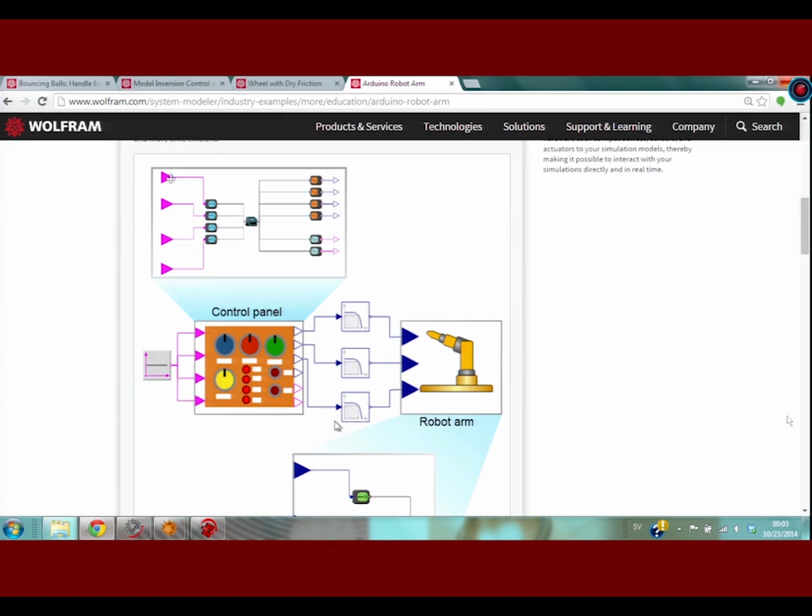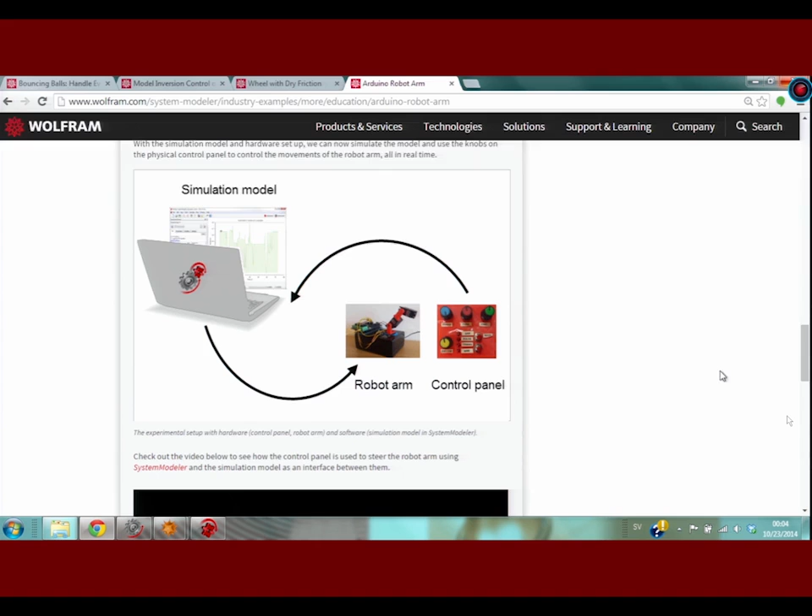This is an example of how you would use the ModelPlug library. In SystemModeler you build up a system with a control panel, a robot arm, and some filters to get a smoother drive of the system. At the end, you have a system where you connect a simulation model with a robot arm - input from the control panel goes to the simulation, which returns to the robot arm.

If we look at that, it will look something like this. You have a connection using the ModelPlug library, complete drag and drop, built together to connect to the Arduino board and communicate with the system. You don't have to do any programming at all - you just use a drag and drop library, just like with the hydraulic library or the mechanical library, plug in your Arduino board, and it runs.

That came out today, so I don't have a slide prepared for that - that was kind of extra information, but the connectivity session will discuss more about that.

But one important thing we added is the hydraulic library. The hydraulic library applies to a lot of different domains. Heavy equipment is probably one you'd most likely think of - aircraft, automotive, robotics, and so on are all systems heavily dependent on hydraulic systems. The library contains components like valves, cylinders, and so on.

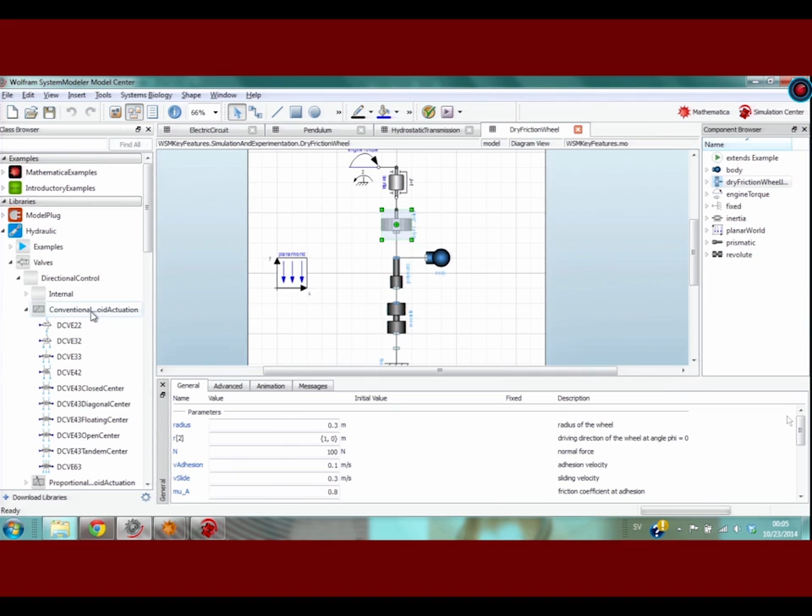If I look at the library - you already saw an example - it has different valves. I can open valves and see the directional control valves of different types, like conventional solenoid actuation valves and proportional actuated valves, and so on.

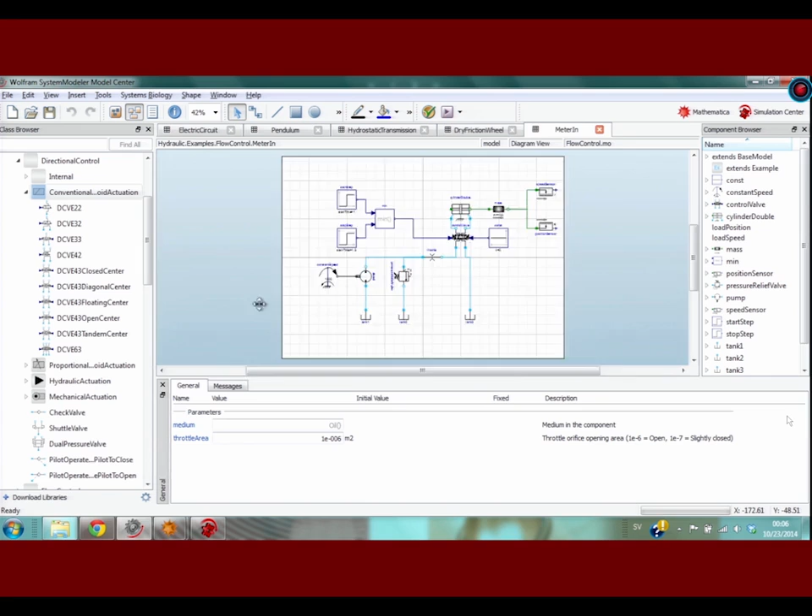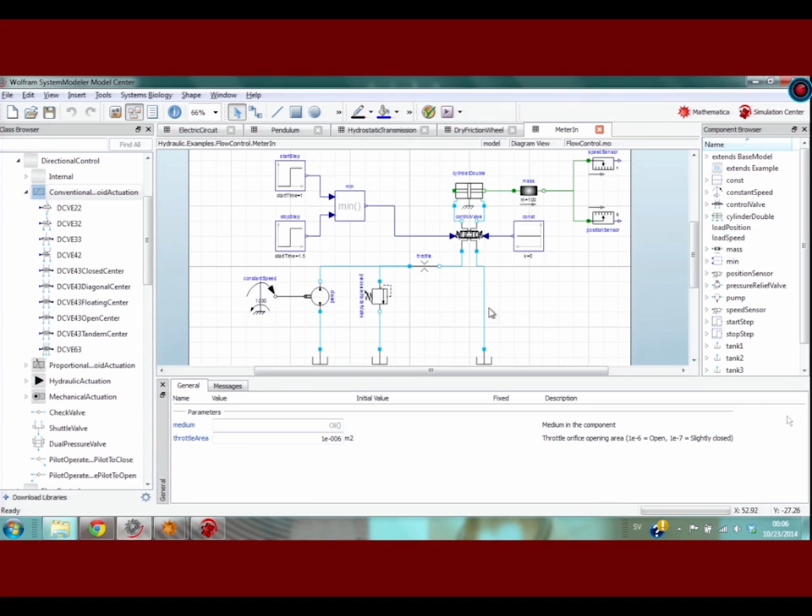We have all these different components, and you can use those to build up a system like a cylinder motion system. If we look at the hydraulic library system, it will look like this: we have a pump driving at a constant speed, which drives a valve, and depending on how we control the valve with input signals, it will be in different positions doing different operations. We also have a pressure relief valve, and at the end what we actuate is a mass that we try to move back and forth.

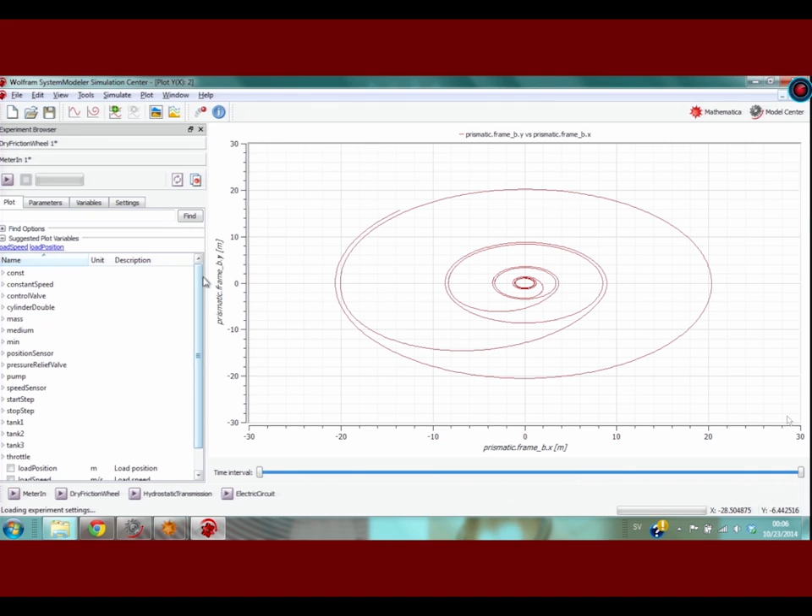When you have this kind of system, it works just the same way as any other SystemModeler model - I simulate that, and I have access to all the components, like the position sensor, so I can open the position sensor and see the position of the mass, how it's moving.

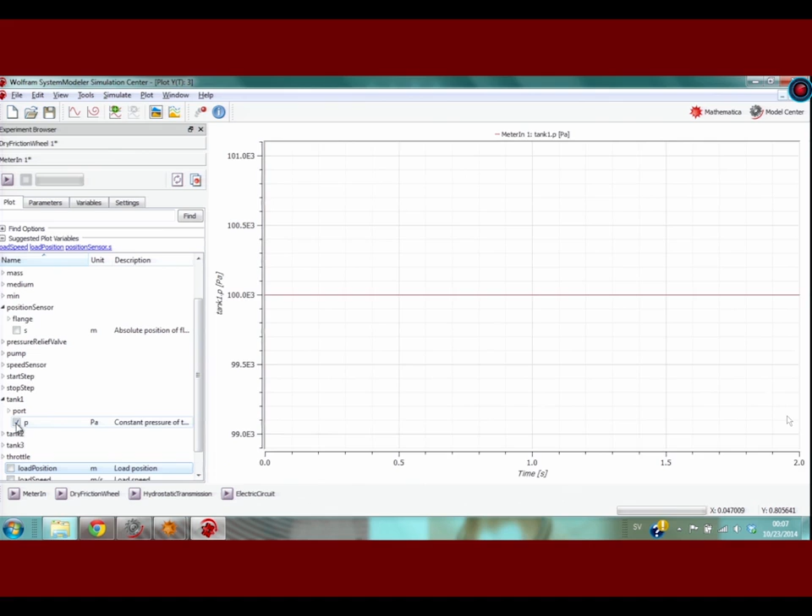Or I can access, let's say, the load speed. Or I can go into any of the tanks and look at the pressure - well, that was boring, the tank will have a constant pressure in this case. But I can go to the pressure relief valve and look at the leakage, pressure, mass flow, and so forth.

So I have access to all these variables, and I can connect it, as you saw, to other systems.

We also added a SmartCooling library. Just like the hydraulic library, this is a commercial library that you have to pay extra for. It's used to model cooling systems, especially in automotive applications, such as cooling fans or water pumps. This library, by the way, is developed by a third party, the Austrian Institute of Technology.

So if you're interested in developing and deploying your own libraries, you can do that through the library store now. Users will be able to buy them, or if you provide it for free, download them for free and install them automatically to SystemModeler.

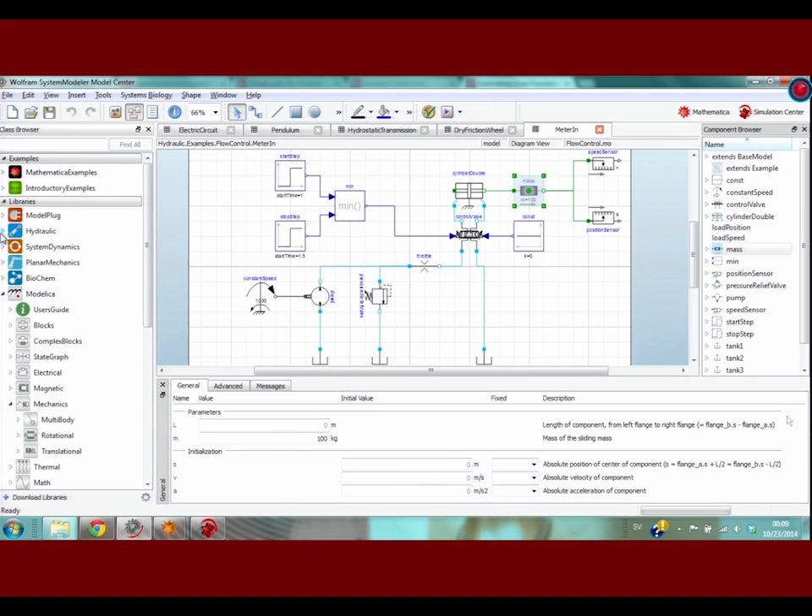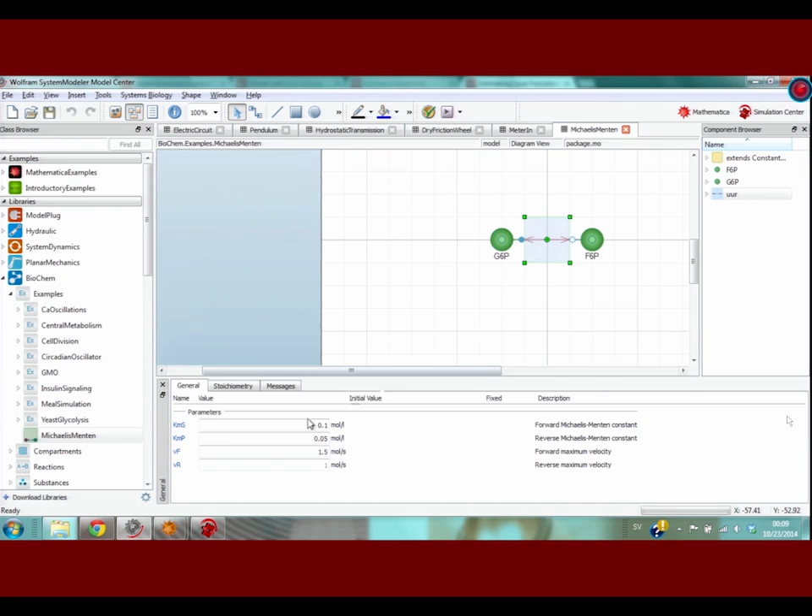Simple pathways that are Biochem examples. This is the simplest possible biochemical pathway: two compounds, glucose 6-phosphate and fructose 6-phosphate, that are connected with some reaction here that has parameters governing the reaction. Basically what we simulated here is the transfer from one to the other, and the mass balance between these two.

And as you go, you develop more complex systems like the metabolic system, which has a lot of these compounds. You can also add things like the liver, the cardiovascular system, and the blood plasma. Each of those has pathways that are interconnected to each other.

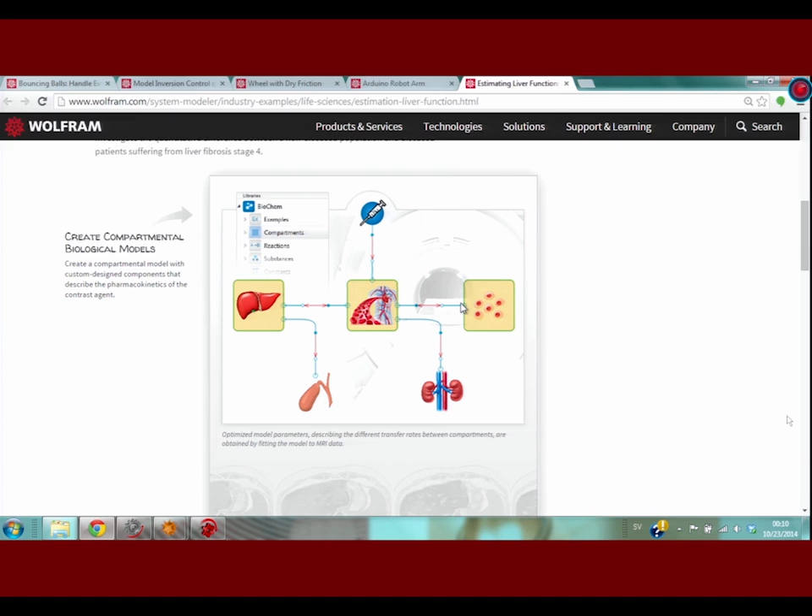And we can do experiments. In this case, we have a contrast agent that we inject, and we want to see how the contrast agent transfers through the body. We can get something like this, where we see variation. We do simulations with different inputs, and we get different outputs for the level of contrast agent in different parts of the body.

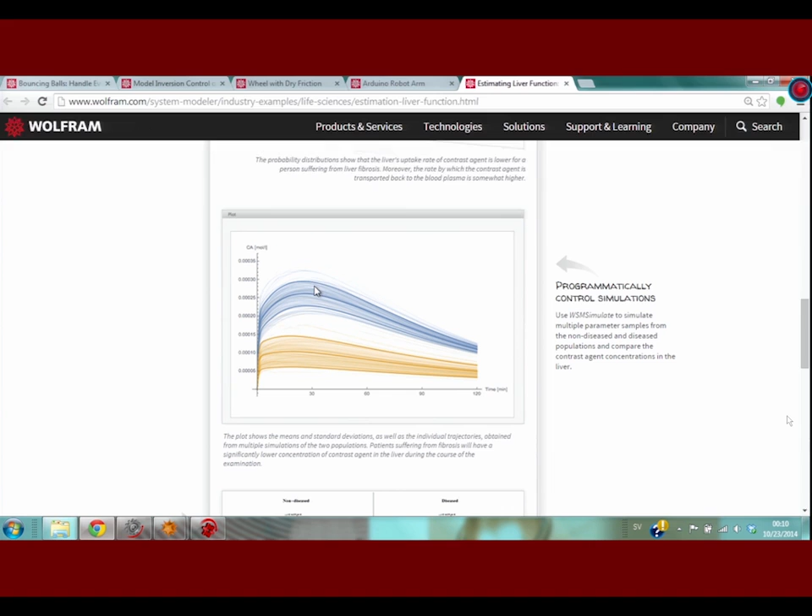But you can also do, and as I saw this, I hadn't planned this, but this is actually an interesting new feature of SystemModeler, where you can see dynamic diagrams. I should play it.

This is when you combine Mathematica and SystemModeler. The diagram you saw is the one drag-and-dropped in SystemModeler, but now from Mathematica you can automatically get arrows that show the flow of contrast agent between different compartments as the simulation goes on.

It's two different simulations, one from a healthy patient and one from someone with a disease. If I repeat that, you can see we are entering the infusion there in the beginning, and we can compare how these two behave differently. So now we can use this to understand how a healthy patient transports the contrast agent compared to a diseased patient.

And if I have time, I might show a little bit larger example later on.

There's a planar mechanics library also added, which, like the Biochem library, is free. You can download that. It's primarily for didactical purposes, for education, so you can use it to do things like a Newton's cradle or similar. The wheel I showed in the previous presentation was done with the planar mechanics library. So that's one example.

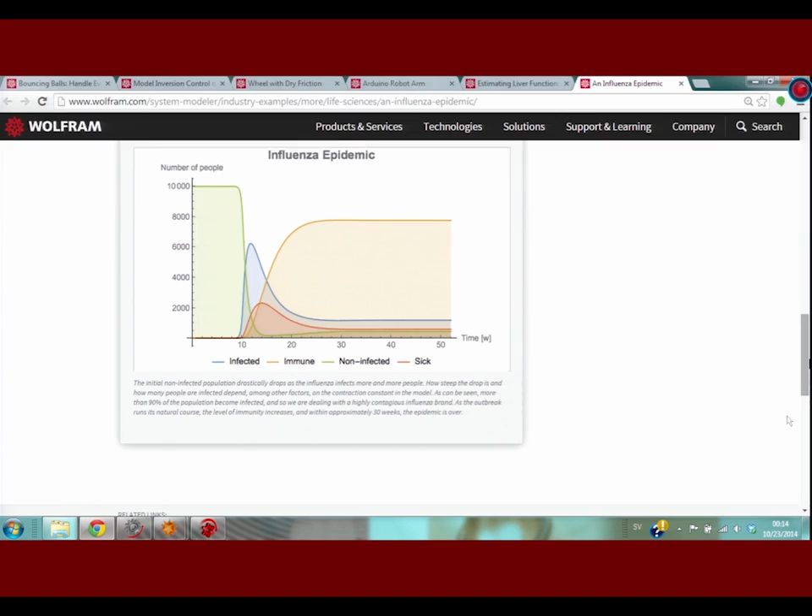In this way, you can use the model to study what happens if we try to stop the influenza from spreading in this location or that. How can we best prevent an epidemic, or even more, a pandemic situation?

So that's the kind of things you do with the system dynamics library.

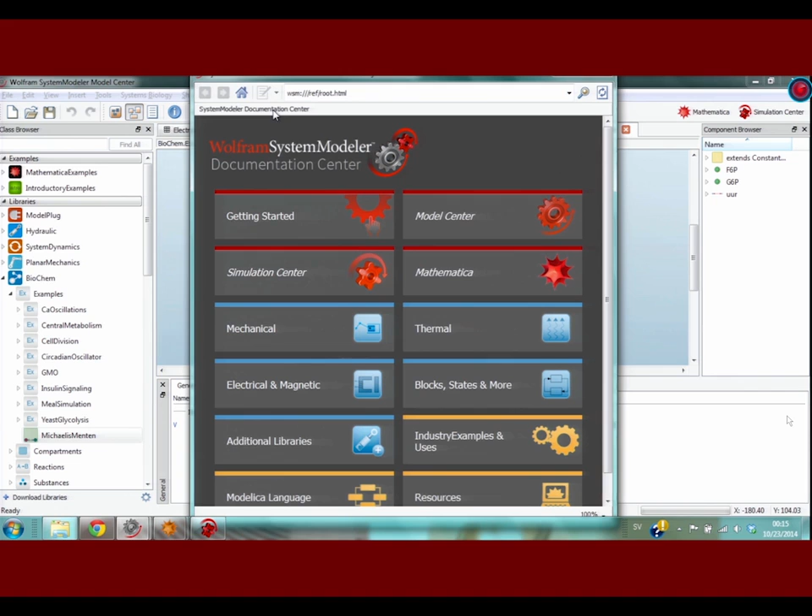We have added a lot of help, and the help system has been vastly improved. We added a documentation center where everything is gathered together. If you want to get started, you click on Get Started, and it looks similar to Mathematica's documentation center, where you will have introductory videos, tutorials, and so on.

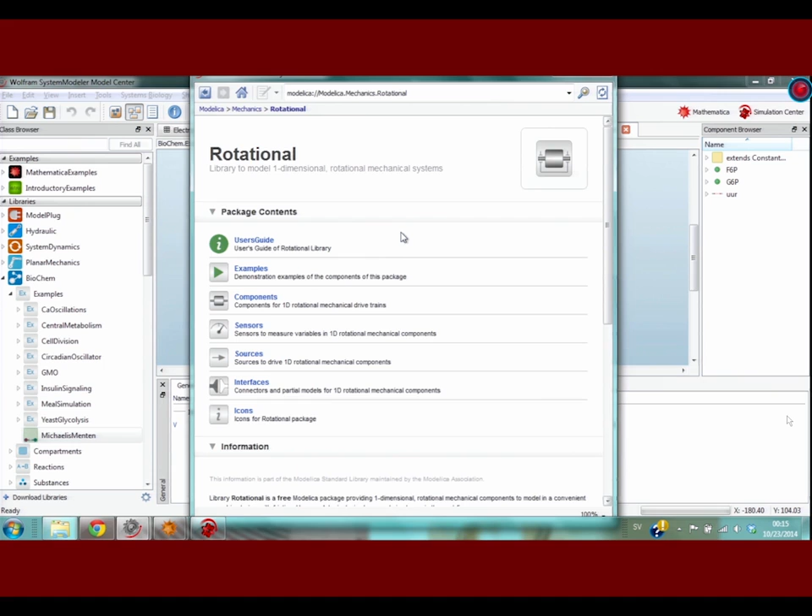If we look at how the components are documented, we can go to the mechanical system, look at the rotational library, and each library has documentation like this, where you can find, let's look at a component like an inertia here.

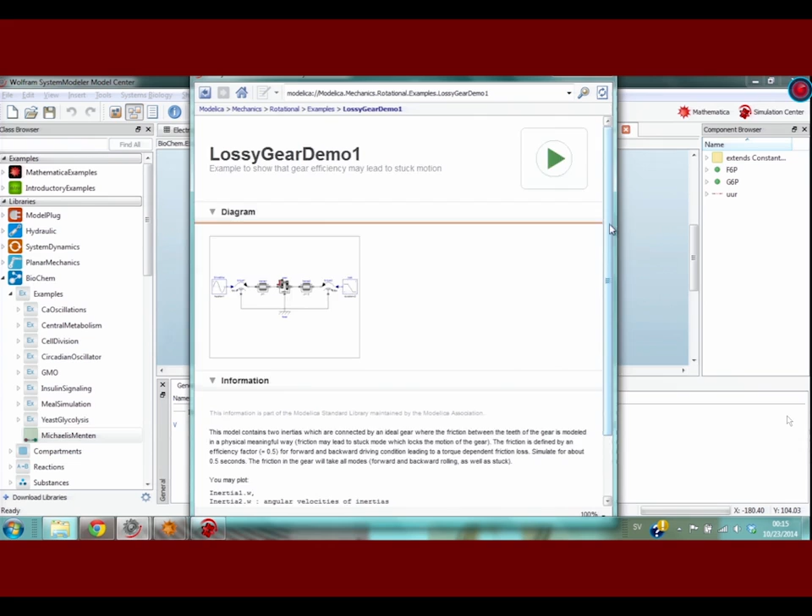If I click on that, I get a list of different features I could look at. For instance, I can see examples where it's used, in order to understand its uses. It automatically lists all examples where it's used, and I can click into that example, learn more about how it's set up and what the results are. I can open the example, simulate it, and try it that way.

So everything is cross-linked and put together so you can either start from an example and find the different components, or start from a component and find examples that correspond to it, showing you how to use it. This is also available from reference.wolfram.com, so you can see the whole documentation from there, and that goes for the built-in libraries and everything else too.

I will not talk too much about this, as there is a separate session for that. Connectivity and deployment is a really important part we added to SystemModeler, and that's why it has a separate session. Basically, it's a way to do things like connecting input devices.

Sometimes I'm bringing a quadricopter with me, or a gamepad, and I have a quadricopter modeled in the simulation center, and I use the gamepad to control it and drive the simulation from that. So that's one thing you might want to do.

Another thing is going the other way around, when you want to drive a physical system from the model. You can do that, for instance, by TCP-based communication, which is standardized and set.

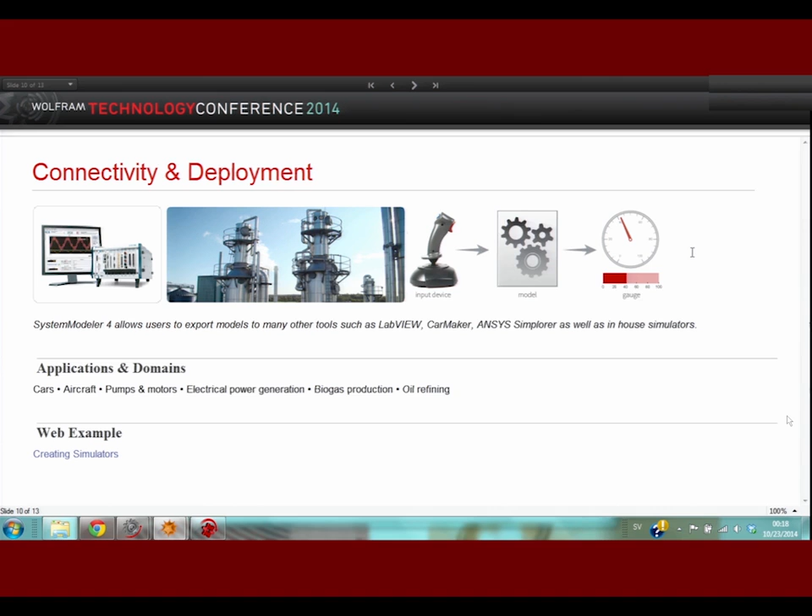There's also something added called Functional Mockup Interface, which is a way to export your models. Once you have the model in SystemModeler and want to use it in some other hardware or software, you can export it as a so-called Functional Mockup Unit, which is a standard used by 30, 40, 50 other tools. So you can import it into tools like NI VeriStand, and develop it for real-time applications and so on. But there is a separate presentation of that, as I said.

Another thing you asked about is how to get the equations into Mathematica. I'll show the other way around first, because we added that to SystemModeler 4. We've improved the integration with Mathematica a lot, so things are much smoother and quicker to do.

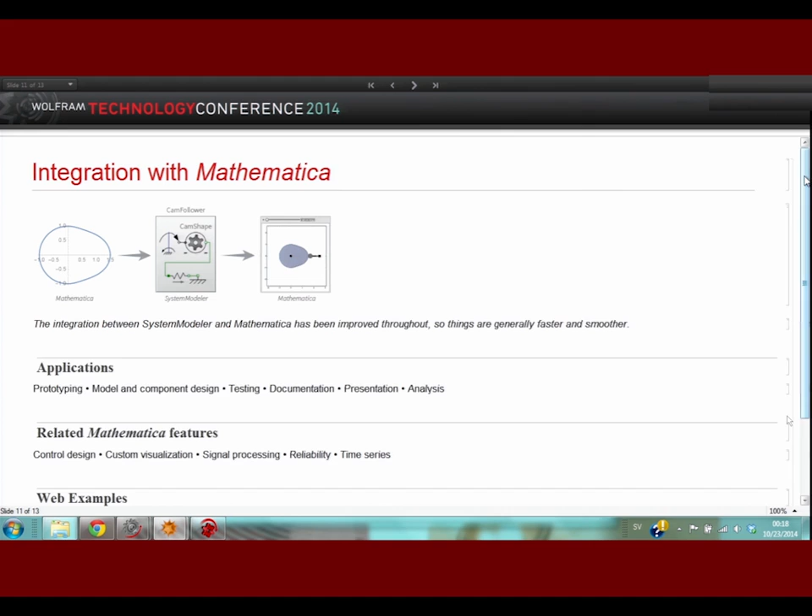One of the things we made possible is creating models from Mathematica. So if we look at this system here in Mathematica, let's zoom in. In Mathematica, you can define state space systems and transfer function systems like this.

We added a function, WSMCreateModel, that takes the Mathematica system and creates the corresponding model with the name you give it. If I press Shift Enter here, this gets created, and if I go to SystemModeler, I can now reuse this system within SystemModeler like this.

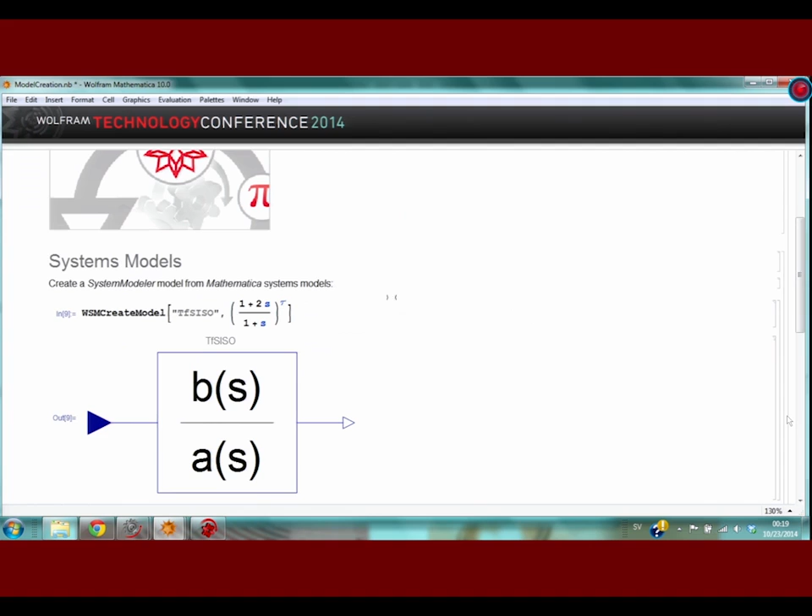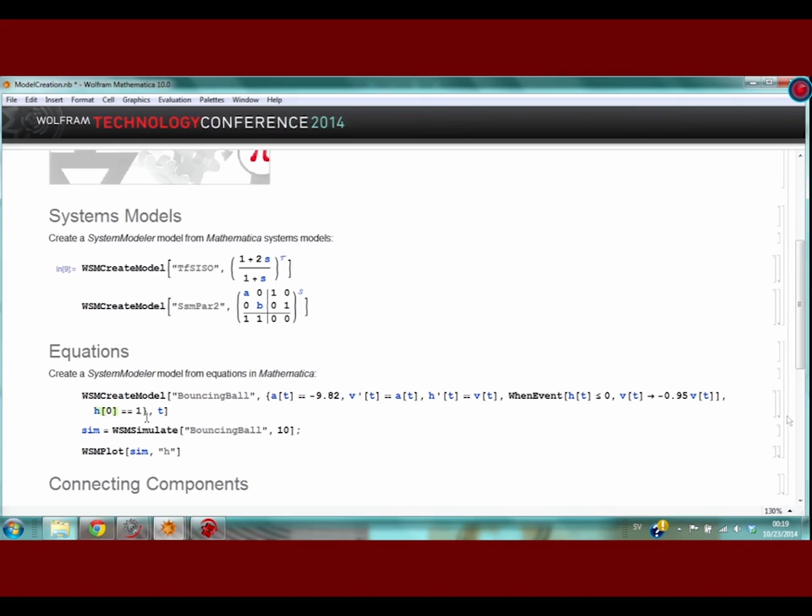It doesn't really make sense to use this in the biochemical pathway example here, but in that way, I can start creating my own components from Mathematica. It could also be based on equations, so I could create a bouncing ball model with typical Mathematica equations, adding events, setting initial equations, and so on.

And I can create that — I'll get it up here, what was the name? Bouncing ball. I get that into my model here, but I can also simulate it from within Mathematica, just like any other simulation or model.

More importantly, rather than using the graphical drag and drop way to connect components, sometimes it makes sense to programmatically create your models from within Mathematica. Now you can use WSMConnectComponents to do connections.

So we'll create something called a system here, and we have a list of components: one called A, which is of the class Abs, and one called sine, which is of the class Sine. These classes are Modelica classes from the libraries within the Modelica standard library. Then we say some connections we want to make: sine.y with a.u. That's the two things we want to do when we create this model.

So this is a Mathematica command. You might wonder, with this simple example, why would I like to do this? This would have been faster to connect in the graphical user interface, of course.

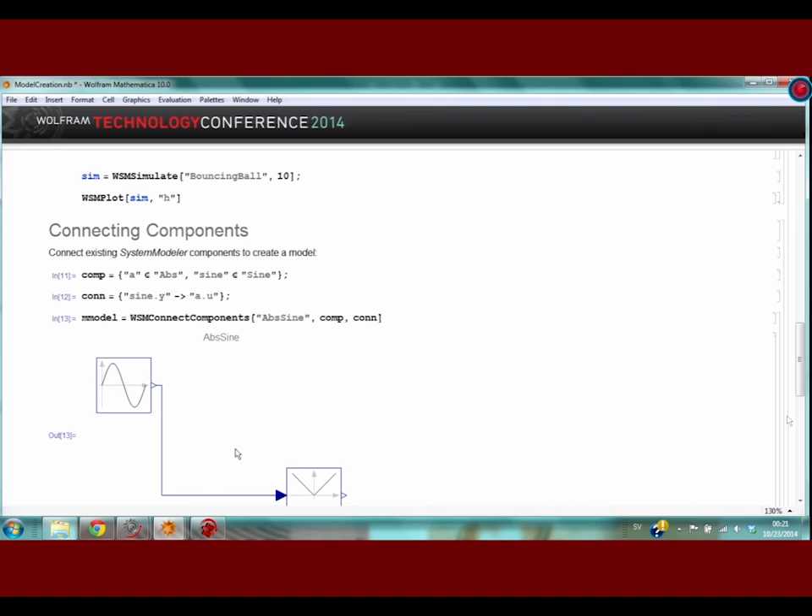But suppose you have a system, let's say an electrical system where you have different types of electrical resistors with different behaviors, like faulty behaviors and so on. And you want to build a huge set of different models where you use this faulty resistor in different combinations at different places. Then you can generate all these programmatically to get a table of models from within Mathematica, rather than having to connect each and every one by hand. So you can get a huge amount of models that you can simulate and then test the behavior.

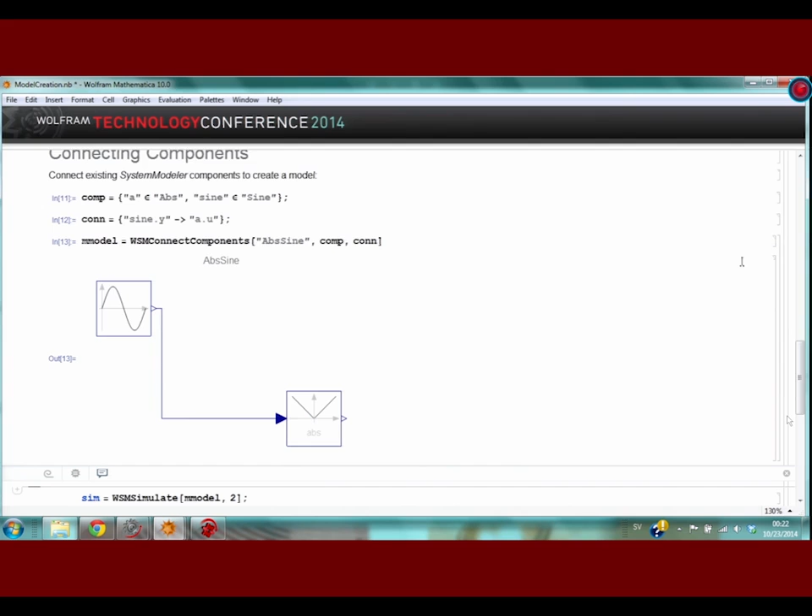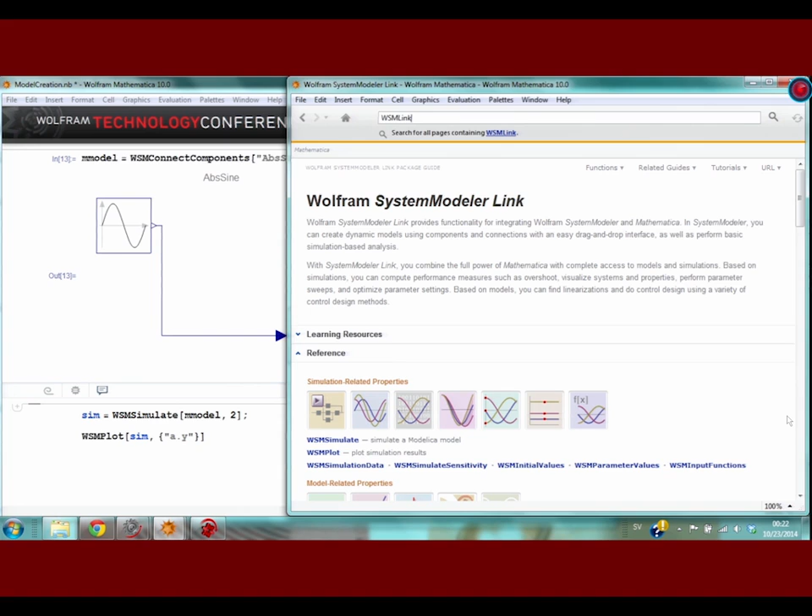So you asked about how do I get equations into Mathematica. There is a function for this. We can query the model for it - there was WSM model data, I guess, rather.

So I went to the help. The help from within Mathematica works the same way as any other Mathematica help, of course. So I have the different functions here, and I can find WSM model data. From WSM model data, I can query things like, give me the diagram. There should be an example of system equations here, I guess. Yeah, so you ask for the model name and system equations, and you will get those into Mathematica.

And then you can start manipulating this in Mathematica. There are several examples online where you can download examples and try it out. Where would I download that? I don't have that prepared, but we can look at that afterwards if you like.

Yeah, because I think we have about 2 minutes left. Don't say that.

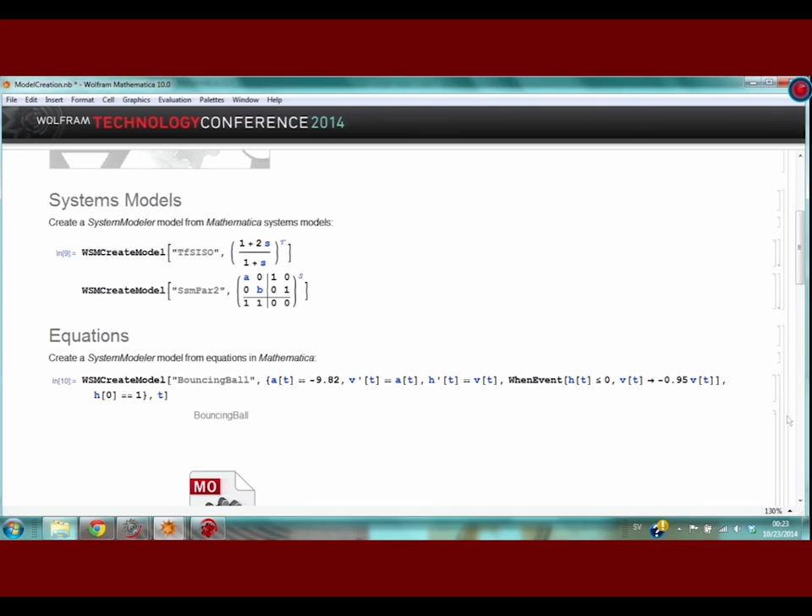So, what is new? This is a very fast go through it, like a selection of what's new, trying to lift it up to a higher level. The first is expanding the scope, so adding both built-in libraries.

I didn't really show examples of that, but there's a digital library, a quasi-stationary library, additional functionality to the rotational and translational library, and so on. I focused quite a lot on new add-on libraries that you can add functionality from, among those the hydraulic library.

There are also things in the way that you can easier get started with it, by adding the documentation center. Yet again, a very quick go through, but it's a very important way to gather things together in a more structured way than in the previous version. There's also a lot of small improvements in Model Center and Simulation Center to make it easier, for instance how to structure parameters and so on.

Connectivity will be a separate presentation - I'll get back to those in the last slide. And...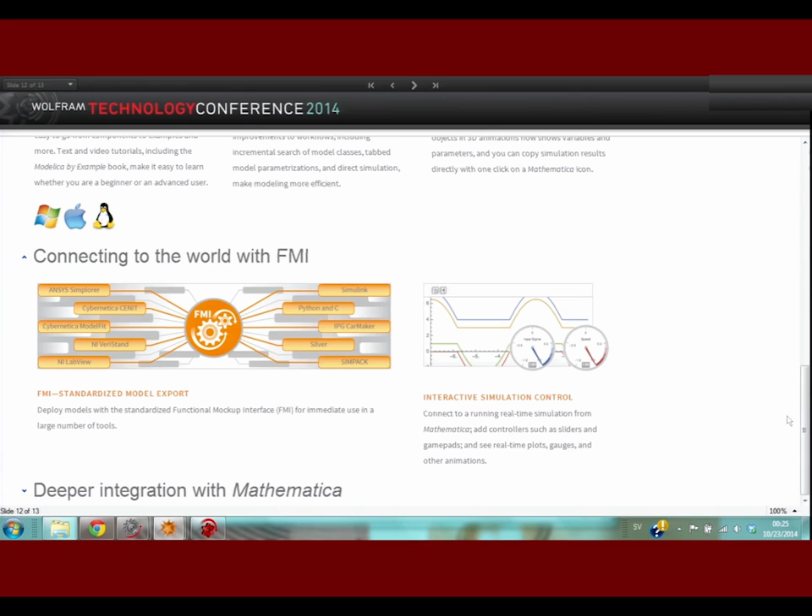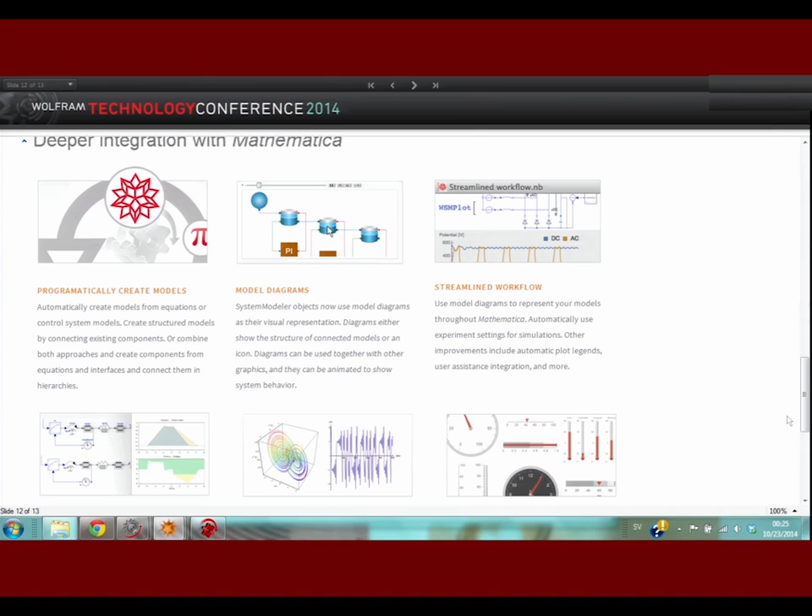Finally, a lot deeper integration with Mathematica, where I quickly showed the dynamic diagrams, which perhaps would be easier to see with tanks that have levels going up and down rather than looking at a plot. There's also the programmatic creation of models. But also, we made sure it's easier to use other built-in functionality within Mathematica that was available since previous versions, including Mathematica 10, like using gauges to visualize your system, to make that more direct.

There's enhanced control system capabilities in Mathematica, and we'll also make that easier to use together with SystemModeler and so on.